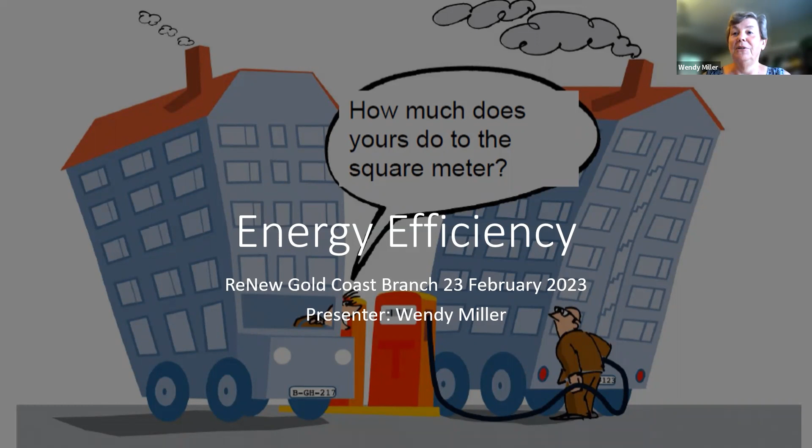So I wanted to start tonight, first of all, by talking about our family's renovation journey. We bought a 1970s house in 1987, a 2-storey brick veneer house, and we had 3 children under school age. I really feel for the people paying mortgages at the moment with the interest rates, etc. When we purchased this house in '87, our interest rate was about 6%. And within 2 years, it went up to 17.5%.

So for the first couple of years, just managing to meet the mortgage repayments was the focus. But after a little while, our focus was actually on trying to renovate this house to achieve a number of things. First was to reduce our family's greenhouse gas emissions, because around about 1995, we went to a seminar somewhere and were reminded that the greenhouse gas emissions from our electricity use would live in the atmosphere for 60 to 100 years.

So we wanted to do something to reduce our contribution to what was then a fairly emerging greenhouse gas emissions problem. This house also had no insulation at all because it was built in the early 70s, so there were no energy efficiency requirements. It was very hot in summer, particularly upstairs where all the living spaces were. We would often find ourselves sleeping on the floor downstairs in summer because it was very hot. And because of the high mortgage rates, etc., we also needed to rein in our energy bills. So our goals were those 3 things: environmental responsibility, improving comfort, and reducing electricity bills.

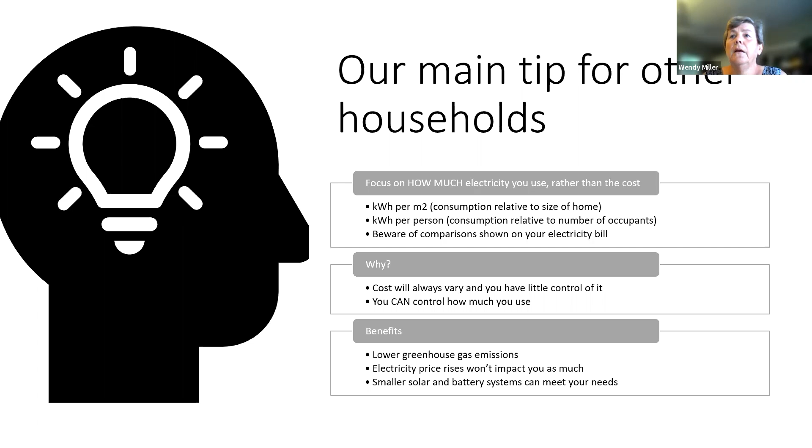Having said all that, I just want to spend a little time focusing on space heating and air conditioning, because in Australia generally, space heating and cooling accounts for somewhere between 40 and 60% of most households' bills. But that figure can be misleading because it depends on whether you live in a cooler or hotter climate, whether you have aircon or not, how that aircon is operated, and how efficient your house is before the aircon is put in. But the indoor conditions of a home impact on multiple systems.

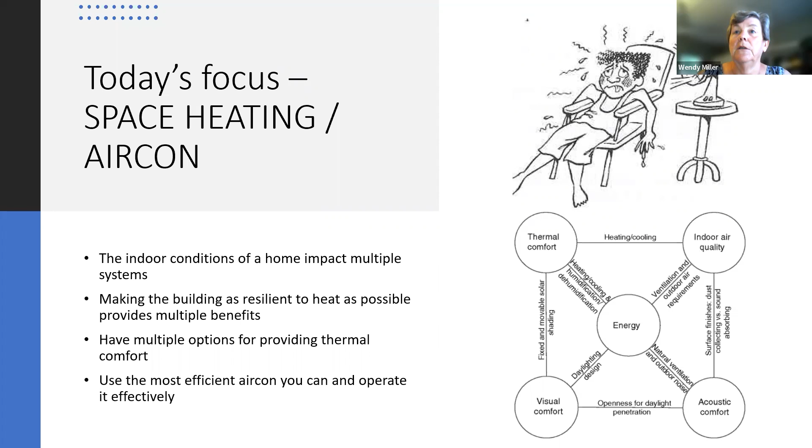I found a good way of thinking about what to do with the house is to think about the Skin Cancer Council's campaign: slip, slop, slap, seek and slide. So, you slip on a shirt, slop on sunscreen, slap on a hat, seek shade and slide on your sunnies. Those same 5 things can apply to a house.

Instead of slipping on a shirt, think of your house as what materials and insulation provide the protective layer against the sun, just as a long sleeve shirt provides a protective layer between the sun and your skin. The slop on sunscreen can refer to the colour of the materials, particularly the external walls and roof — lighter colours reflect more of the sun's radiation than darker colours. The colour of a roof or wall does not impact on the cost of a building, it's just an aesthetic thing. So choosing light colours can really make a big difference to how much heat comes into your house that you then have to pump out.

Slap refers to slap on a hat — so think of the eaves of your house, and or external shades and landscaping, that provide shade for walls and windows. In the Gold Coast, because of our latitude, if you want to avoid all sun shining on your external walls and windows in the summer months, you need an eave of about 900 millimetres. 900 millimetre eaves will make sure the sun does not hit your walls or windows at all between mid-September and mid-March, the two equinoxes.

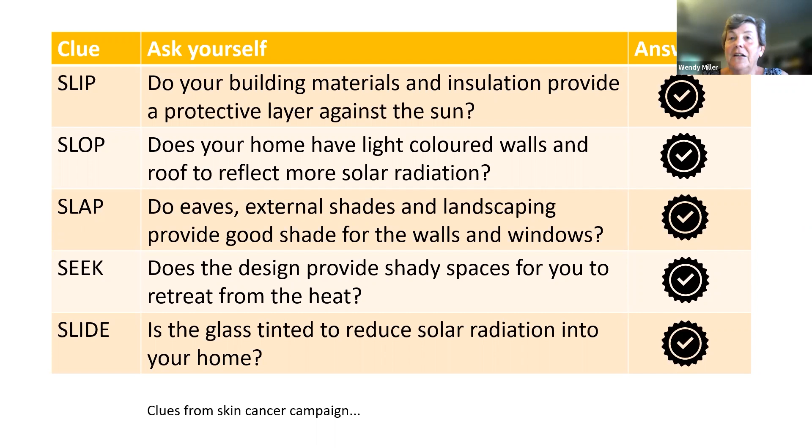Seek shade is looking at the actual design or floor plan of the house, and whether there are shady or cool spaces that you can retreat to from the heat. The slide on sunnies refers to the glazing you use in your windows — if it's tinted, like your sunglasses are, it can also reduce solar radiation into your home. I find those 5 words are really a good clue for prompting what types of actions can happen.

And then just a little bit of a word about air conditioners.

It's interesting that if you follow the history of the growth of air conditioning, which came out of the USA, air conditioners were first introduced for industrial purposes, actually in a newspaper factory, to try to stop the humidity from destroying the ink in the paper. And it moved into housing as a means of making sure there was demand for the new coal power stations at the time. The building industry decided it was cheaper to build, excuse my words, crappy houses with little insulation or shading and put in an air conditioner than to actually build houses that didn't require air conditioning. So the whole history of air conditioning is interesting to watch.

But in essence, an air conditioner is a pump, and it pumps heat from your house to the outside air. Because we're living on the Gold Coast, quite a few people are boaties, so think of a boat. If you have a bigger boat, you most likely have a bilge pump, required to pump the water that might make its way into the boat. If you have a smaller boat, you might just have a bucket tied to a rope to bail out the water as it comes in. I'm sure no boatie, if they have a boat with lots of leaks letting water in all the time, thinks, I'll just get a bigger bilge pump. What they do is fix up the leaks first. And that's what we need to do with our houses. We need to fix the leaks first to stop the heat from coming in, and then you don't need as big a pump, an air conditioner, to make the conditions good.

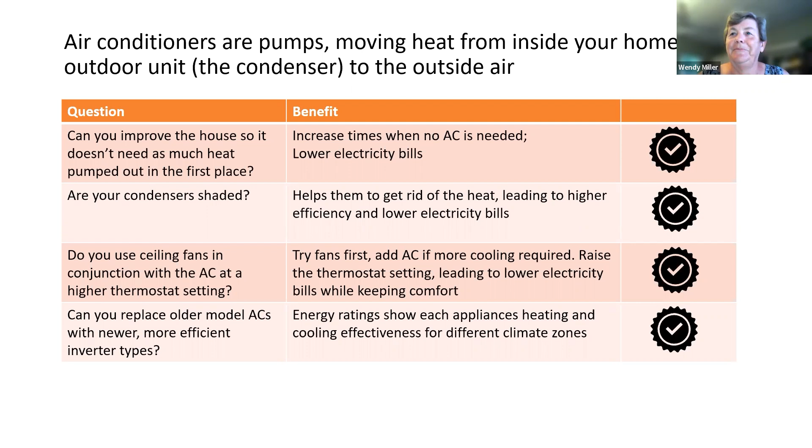And how do you know all of that? This is something Seb might cover a bit later. Australia has something called the National Home Energy or House Energy Rating Scheme. This is an energy rating that's required for all new dwellings and all major renovations. I just want to speak a few minutes about that.

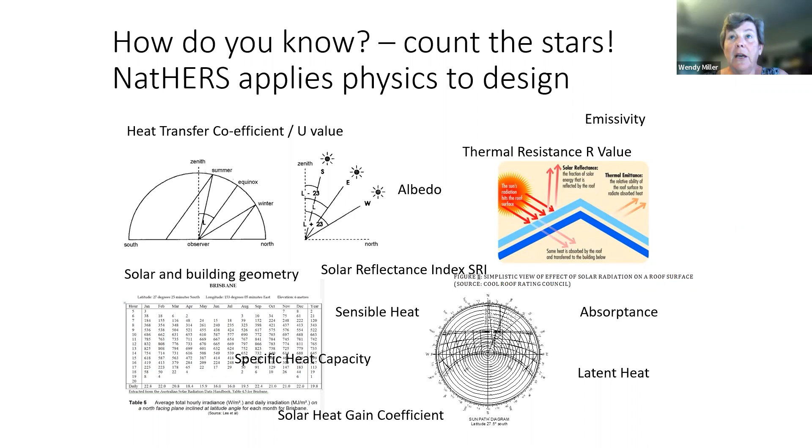Essentially all the physics of materials, how the sun moves in the sky, and how materials absorb or give out heat, etc., is put into a computer program. Then an energy assessor puts in the floor plan of the house and the geometry of the house, and they put in all the information about the walls, roof, ceiling, and all the window styles, door sizes and types, etc.

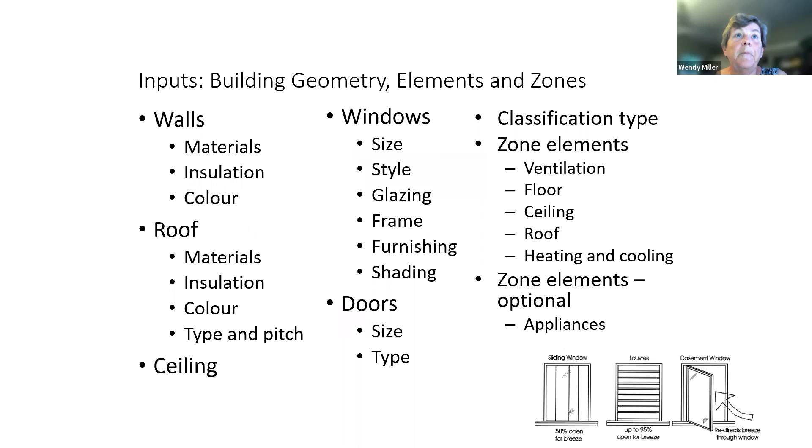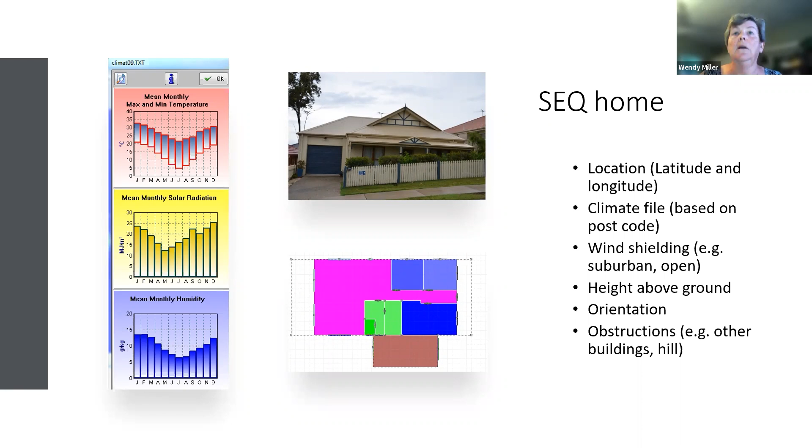All of that information together is used to calculate, for each room, the expected hourly temperature for a whole year. And using that information, it comes out with an energy rating certificate, which calculates how much energy you need to pump out of that house in order to make those rooms a particular temperature.

So roughly 25 degrees for living rooms during daytime hours and into the evening, and about the same for bedrooms in the late afternoon and overnight. So a certificate gives you an idea of how comfortable or uncomfortable a house will be and how much energy you're going to need to buy to pump out heat.

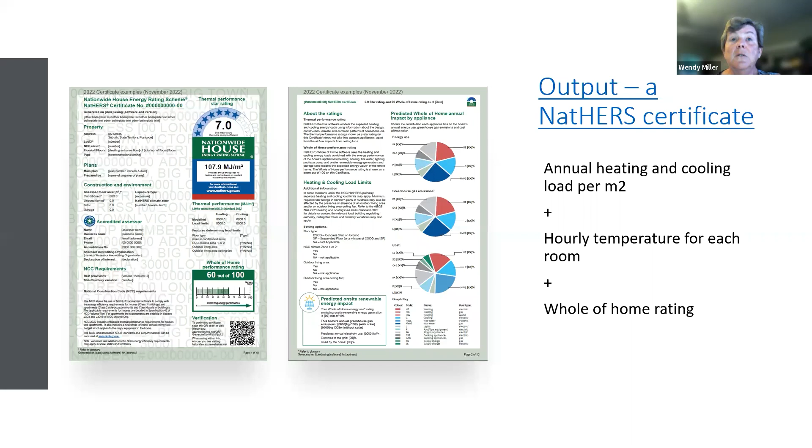The new certificates, only coming into place later this year, will also give a whole of home rating. I think Seb, you might be talking about that a bit later. In essence, it gives all that information, as well as how much energy your hot water system, any air conditioners and pool pumps, etc., are going to use, and what size PV or solar system you need in order to meet that energy requirement.

So my overall advice, if you're designing a new home or doing a major renovation, is that you insist on working with an architect or a design company that works with an energy assessor who actually optimises the design for energy efficiency during the process, rather than just getting a certificate at the end. You need a certificate before you can get building approval, but too often building companies are only getting the certificate as a means of getting approval, not as a means of making the best house.

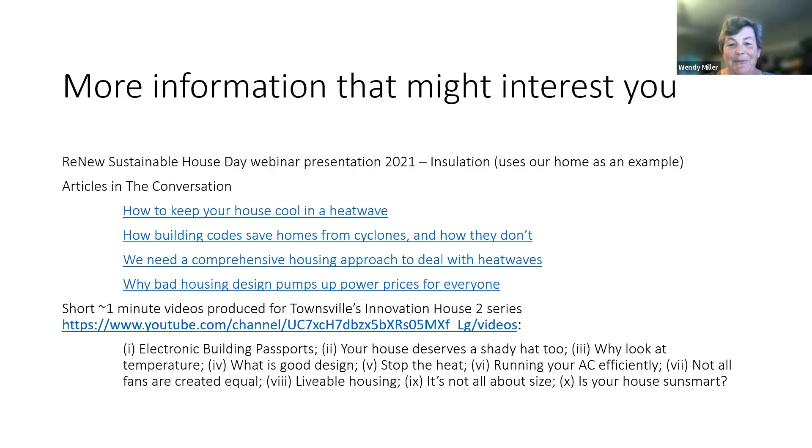Need to unmute. You'd think that I'd know how to do that. Thank you, pardon me. You'd think so, but I haven't.

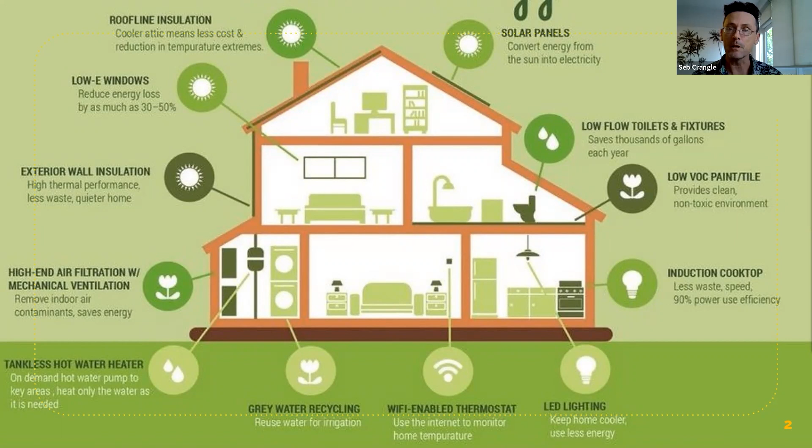There are a few main categories of things we can do to reduce a home's energy use. They can range from behavioural, doing things differently, to low-cost DIY improvements like draft proofing, sealing up gaps, stopping your house being leaky like a leaky boat, and then all the way up to higher cost but often more effective technology like hot water heat pumps and efficient air conditioner heat pumps.

I'm not going to go into these in any detail, but these are some of the main categories, and some of the things Wendy's already spoken about that affect the energy of your home. As she said, heating and cooling can be 40, 50, 60% of a home's energy use, especially in colder climates or in really hot climates where they need to use air conditioning a lot of the time.

The efficiency of the technology you use will have a big impact on your energy bills, but there's also lots of things you can do to reduce the need for artificial heating and cooling, such as good window coverings, glazing on windows, ceiling fans, all sorts of things. You don't have to be spending a lot of money on super efficient technology.

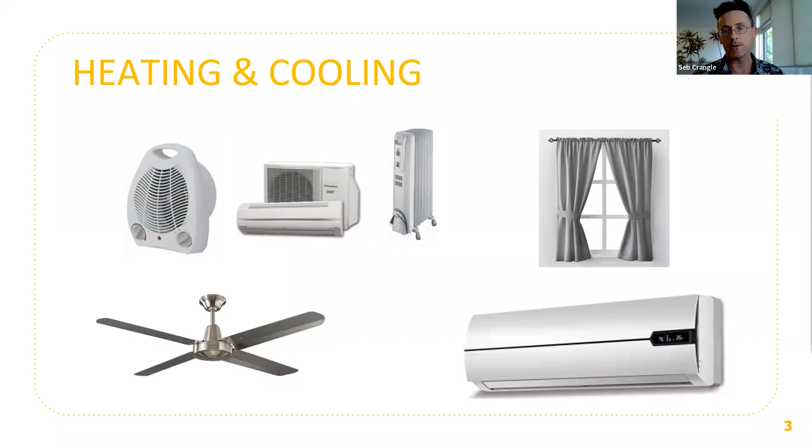It's interesting when she was talking about optimal temperatures for air conditioners. This is often what's espoused, different ranges depending on winter versus summer. And it's a good point that she made, because where I am today, I'm actually down in Melbourne visiting, and it's very hot outside.

It's a dry 32 degrees, and I've got my aircon on 29 degrees. A lot of people would think, oh, he's an extremist, he's just living uncomfortably to save energy. But it's so true that just having that indoor temperature a few degrees different from outside, and also taking out the humidity from the air, makes you feel a lot more comfortable than being exposed to the dry 32 degrees outside. And everyone feels heat differently as well.

So you can adjust that temperature slowly down till you get to a comfortable position. And in winter, the reverse - start it on 17 degrees and see how that feels with a good jumper on. Then if you're still cold, put it up to 18, 19, and so forth. If you have kids that are feeling it, put it up to 20. It's not a fixed figure that you need to be aiming for.

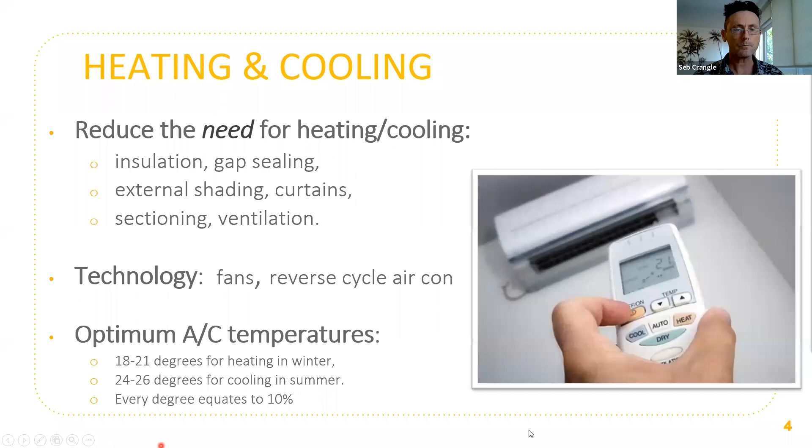How much water it's dispensing is a huge factor in how much hot water you're using, and therefore how much energy you're consuming. So, for example, if you have a shower head that produces 7 litres of water a minute instead of 15, you've effectively halved your hot water bills for the cost of about $80. And hot water is often about 30% of a home's energy use, and sometimes up to 50%.

And of course, we have solar hot water.

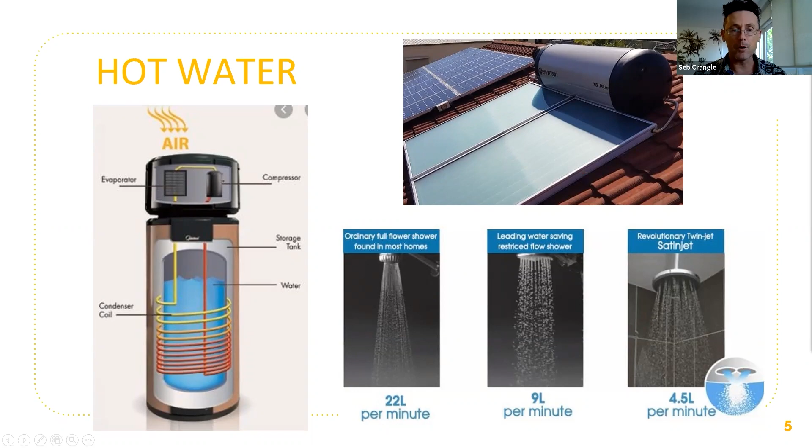Insulation - I'm going to start moving a bit quicker now so I can get on to talking about scorecard. But Wendy talked about insulation, huge factor. This picture shows that not only the ceiling, but also ideally your walls can be insulated, and also your subfloor, depending on what climate you're in and whether you need to protect your house from heat outside or cold, keeping heat inside.

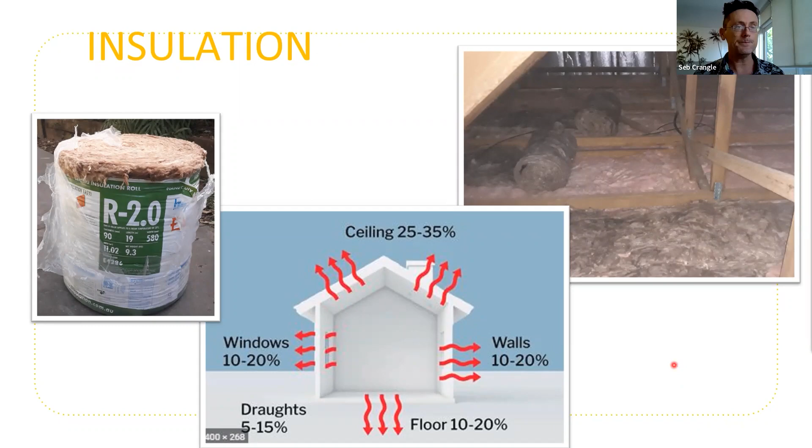Draught proofing - that's about fixing those leaks that Wendy was talking about. Many different aspects of that, and often things you can DIY with materials from online energy efficiency stores or from hardware stores.

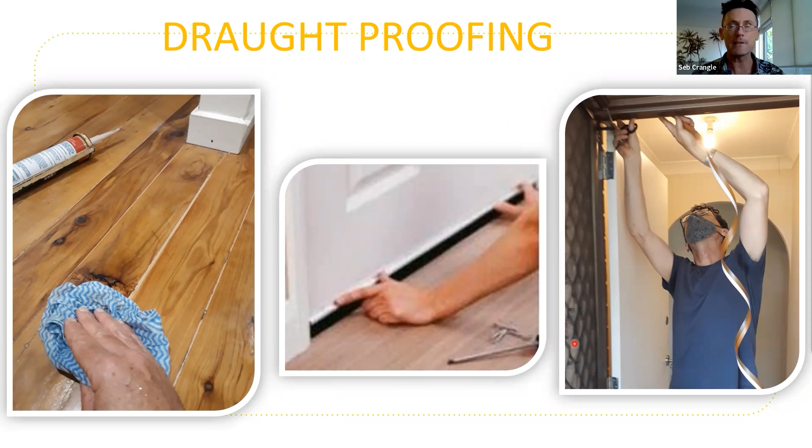And lastly, I think, window shading is critical. If you can stop, in hot climates, direct sun pouring into your house, then you're halfway to keeping it a comfortable temperature. That can be anything from external trees, shading the western wall of your house, for example, through to external blinds and awnings. Internal blinds are also good, but if you can do external, it's even more effective in that it stops the heat getting through the window in the first place.

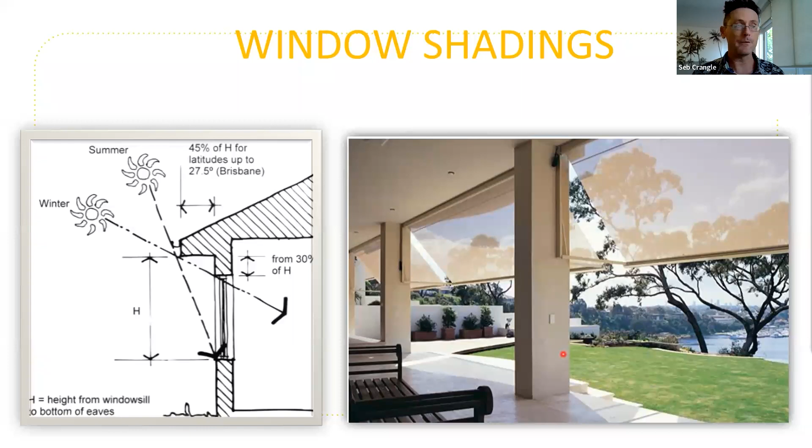Okay, so on to talking about scorecard. The Residential Efficiency Scorecard is a tool that was developed by the Victorian government to help homes reduce their energy consumption and thereby their energy costs and their carbon footprints. In 2021, it became a national tool, and I jumped on to get accredited because I was really looking for a way that I could deliver comprehensive energy assessments into people's homes.

This tool is similar to NatHERS that Wendy was talking about, except that it rates and assesses existing homes as opposed to new builds and looking at the design of a home. Similar to the new whole of home tool that's coming out for assessing designs, it also looks at the fixed appliances like hot water and air conditioning and how efficient they are, and that factors into the overall assessment of your house.

This is some of the things that an assessment looks at, and you need to have a qualified assessor come and do it. It has to be on site - they can't do it remotely. They come and visit you, do a consultation, and model your house in the scorecard software.

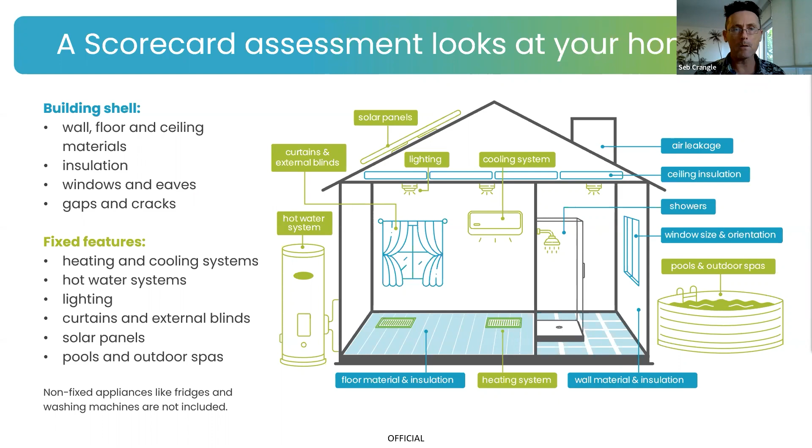So the same things we've just been talking about - wall and floor materials, insulation, windows and eaves, how leaky your house is in terms of gaps and drafts, what sort of heating and cooling systems it has, lighting, curtains, solar, whether you have solar panels and so forth. So we'll talk a bit more about why this is a useful thing to do.

So a scorecard is a tool to rate the efficiency of a home, similar to the way that washing machines and fridges are rated. The difference is it doesn't just give you a rating and leave you with a house that's potentially inefficient, but it gives you the advice and prioritization to take action to improve the star rating of your house and thereby improve the energy demands and carbon footprint of the home.

So it tells you where the energy is being used in your home. It makes recommendations to reduce that energy use. It rates how well your home will perform on very hot and cold days, in terms of understanding comfort and what you can do about improving thermal comfort. And it's delivered by knowledgeable accredited assessors like myself.

You also get a certificate for your house, which you can use just for your information, or also it's valuable if you're selling the house. If you want to sell it as an energy efficient home, you can demonstrate that by this certificate.

And you can also, even renting a house, more and more the government is looking at making it compulsory, we hope, that a house is assessed this way so that when you're renting and buying a house, you will know what it's going to cost you in energy and how poor the design is and how much work it needs to make it a low carbon, low energy house. So the certificate's really useful.

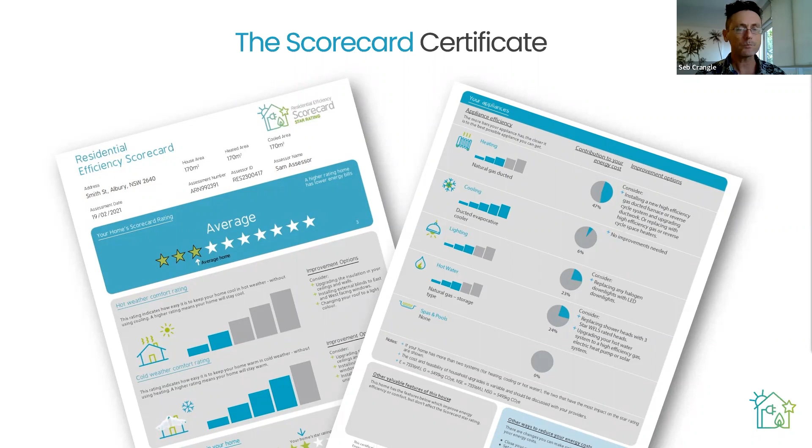I'll whip through what it covers. This is a two-page certificate. The first is the headline star rating out of 10, and that's essentially a cost metric. So it talks about how much it costs to run the home to keep it a comfortable temperature all year.

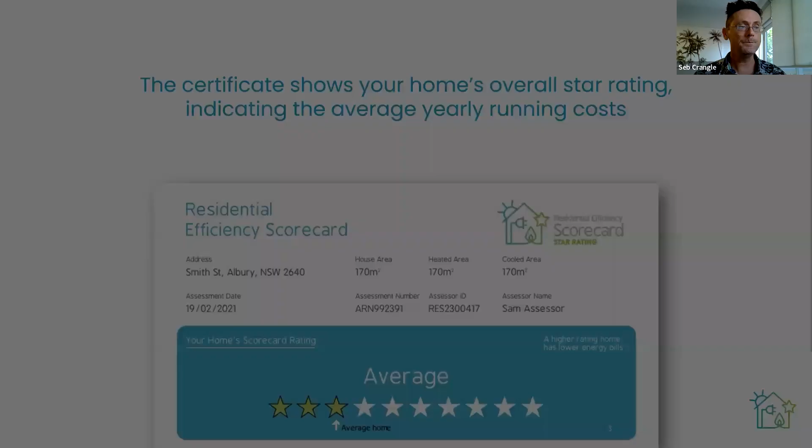As an aside, this is an indication in Victoria, in any case, of the cost of energy depending on the star rating of a house. So the average home, which is 3 stars, you're looking at around $1,700 a year to run those fixed appliances, heating and cooling and so forth. Whereas an 8-star house, you're looking at an energy cost of $260. So there's a huge range, and it goes to show it really can hit your hip pocket, improving the efficiency of your house.

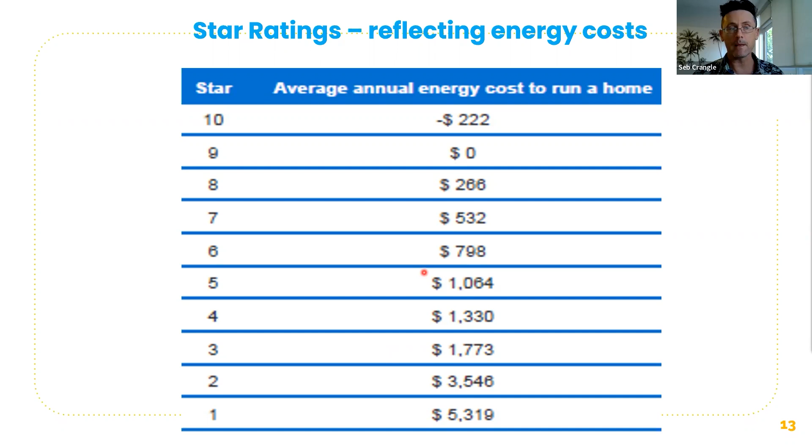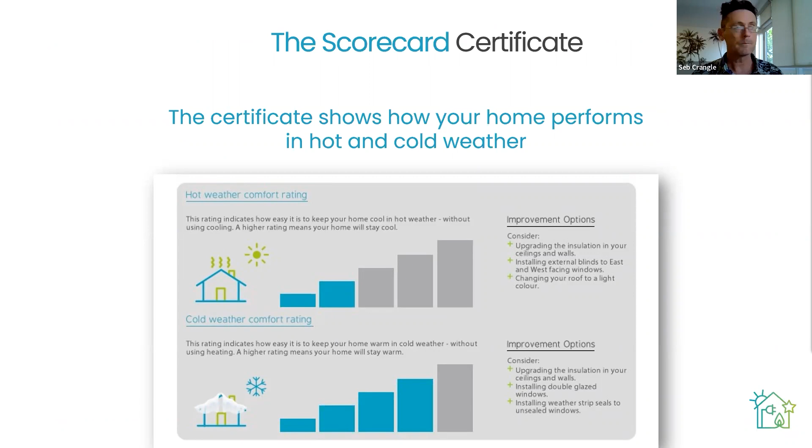On the next page of the scorecard certificate, it talks about comfort rating, and that's how well your house protects you from extreme temperatures outside, even if you didn't have any air conditioning or artificial heating and cooling. And it also shows you what your star rating would be if you had a modest solar system, or if you have solar, what it would be if you didn't have that solar system, so the underlying efficiency of the house.

On the second page, it breaks down the appliances in the home and helps you understand what they're contributing to your overall energy costs. That's after the assessor has inputted the exact model and star rating of those appliances, so it knows exactly what you've got and how efficient they are relative to what else is out there on the market. It also then makes recommendations based on the modelling and what's been inputted as to what you can best do to improve it.

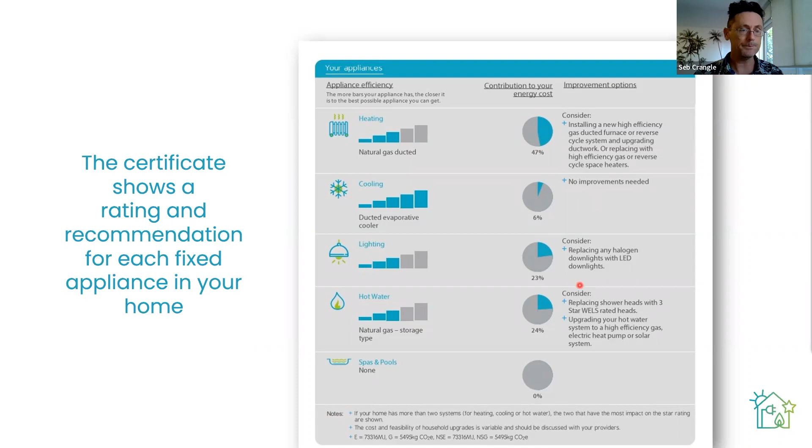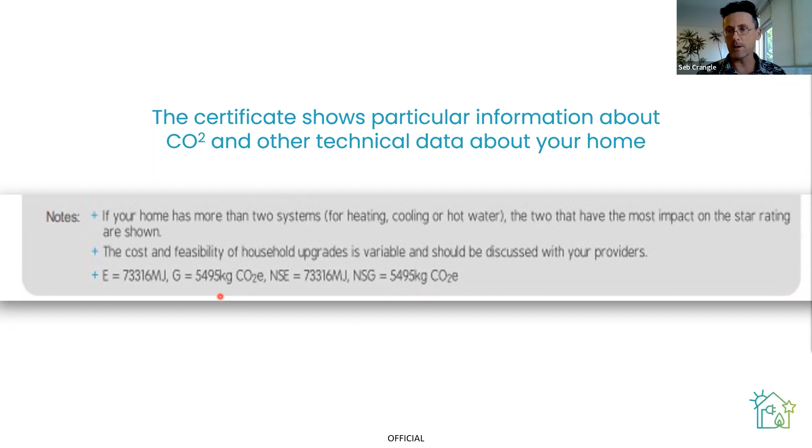And last but not least, in the fine print, which is the part I like the most, it shows you the carbon footprint of the house, this figure here. So in this house, it's 5.5 tonnes. As you make improvements to the house, the assessor can update your certificate and show you how much carbon you've saved on an annual basis and how much energy you've saved by those actions. You can also compare potential actions by doing what we call a variation assessment.

So how does the process of getting a scorecard assessment work? First of all, you find an assessor, and there's a page with a list of all of the assessors. There's a couple of us, or a few of us, that service the Gold Coast, if that's where you are. I live in northern New South Wales. There's a couple in the Gold Coast, and there's also a couple of scorecard assessors in Brisbane who travel down to southeast Queensland.

So then we visit your house and complete the assessment, entering in all the details of the building construction, the appliances, window coverings, everything. Then we give you the feedback and a consultation along with your certificate, and send you the final certificate by email. So that's Scorecard.